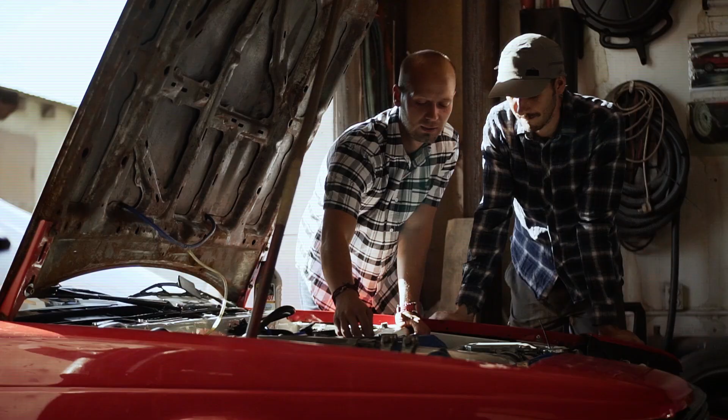If you are getting a P0410 error code, this video is going to show you two practical solutions to fix the error code at home. Use the OBD2 scanner to scan your vehicle and see the error code P0410.

It indicates that the engine control module detected the engine oxygen sensor did not detect an increase in the oxygen level in the exhaust when the air injection system was commanded on during an active test.

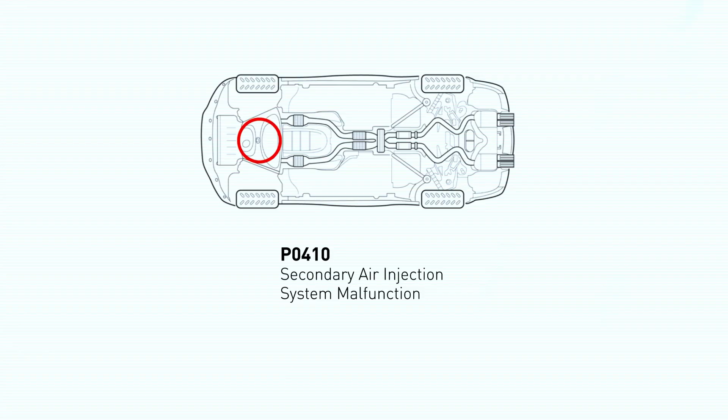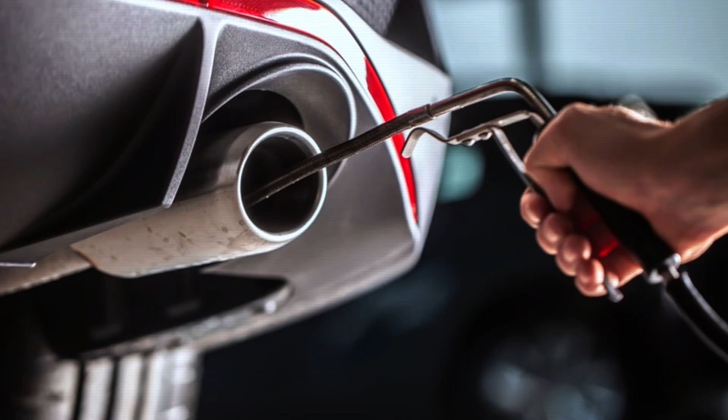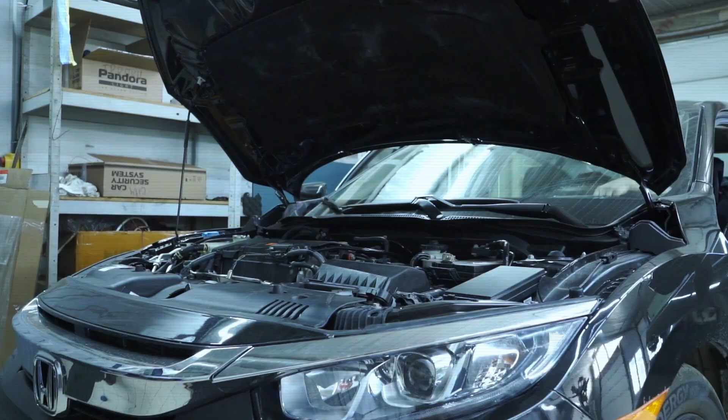The P0410 code often causes the following symptoms: check engine light (MIL) on. This is the most common symptom, often accompanied by a failed emissions/smog test. Rough idle or stall. The engine may run roughly at idle or stall, particularly if the EGR valve is stuck open. Engine hesitation/surging, poor acceleration or hesitation when pressing the gas pedal.

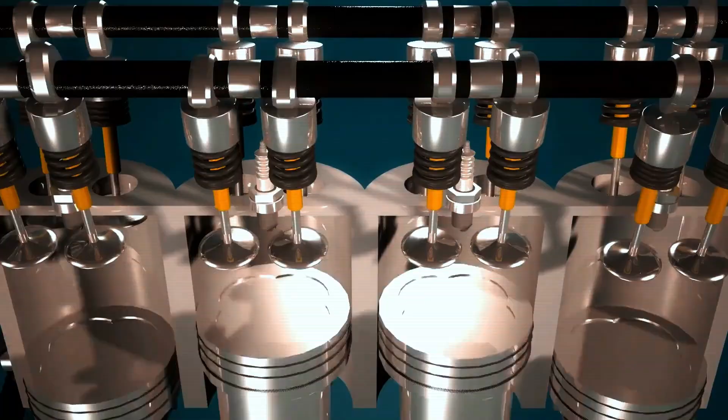Engine knocking/pinging. Increased combustion temperatures due to lack of EGR can cause detonation, spark knock, under load. Reduced fuel economy. The engine may run less efficiently. Here are two simple DIY methods you can try to solve this problem.

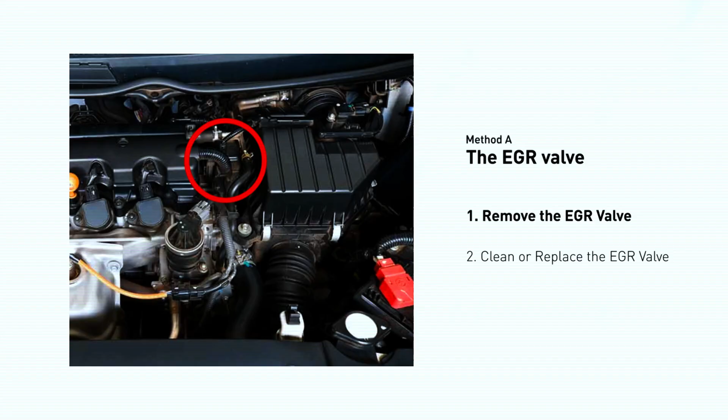Method A, the EGR valve. Looking at the engine from the front, the EGR valve is located towards the rear of the engine just to the right side of the center. First, carefully remove the EGR valve from your car. Turn the EGR valve upside down and fill it up with the WD-40 cleaner.

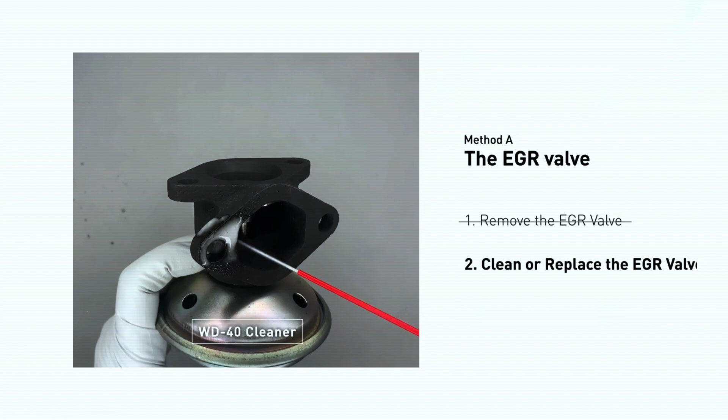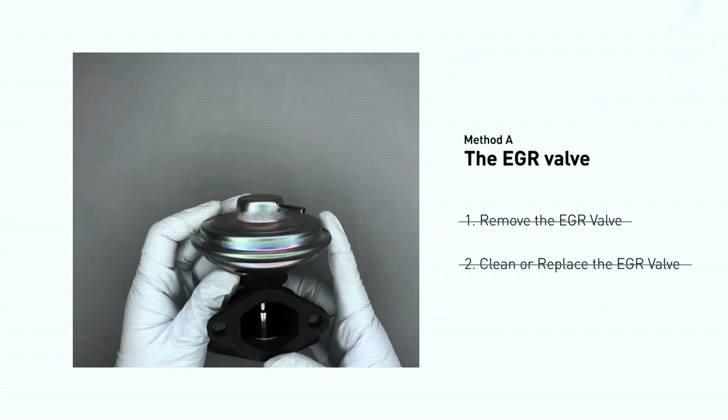Let it soak for 5 hours for the solvent to get rid of all the carbon buildups. After the cleaned EGR valve gets dry, reinstall it back in the car. If it is too dirty to be cleaned, you may replace it with a new EGR valve.

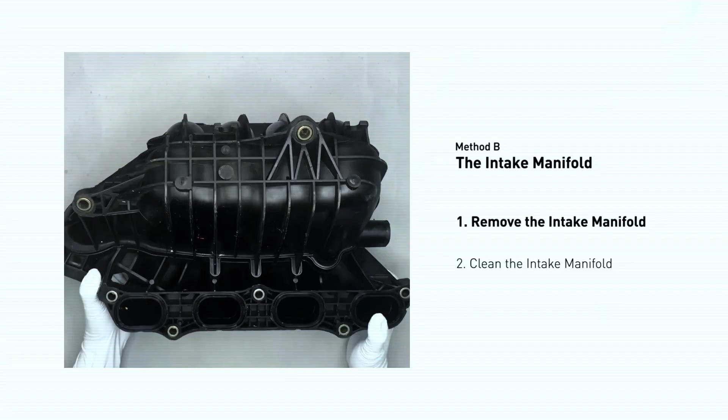Method B, the intake manifold. The intake manifold sits on top of the engine and plays a key role in the combustion process. First, carefully remove the intake manifold from the engine.

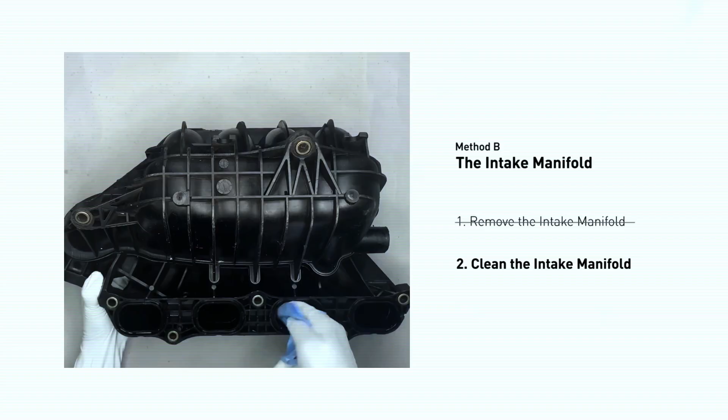Use the WD-40 cleaner to clean up the crud inside the intake manifold, and wipe it well to make sure all the carbon buildup is now removed. Reinstall the intake manifold back after the cleaned intake manifold is dried.

So here are two of the most practical solutions to fix the P0410 error code. After the repair, you can now use the OBD2 scanner to clear the error code. And tap the rescan button one more time to make sure everything is fine with your vehicle.